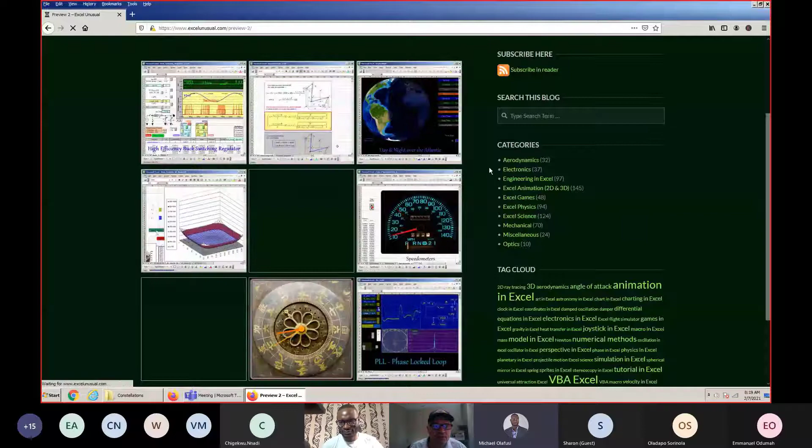Audience, all of what you are seeing here is Excel - all those things you're seeing are Excel. I'm trying to show you this particular model. Okay, here it is, I'm gonna zoom in. This is low resolution, but right here to the right is the model I was telling you about - this is the adaptive filter, adaptive equalizer. It's changing very fast, but essentially this is the schematic, the diagram right here.

Okay, on top with the blue you have the bad signal, and on the bottom with green you have the good signal after the filter.

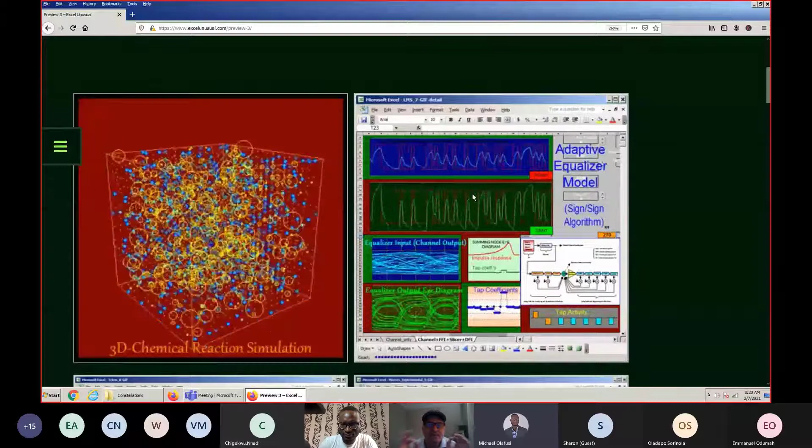Not to tell you more, but when people saw this, after a month I had my Excel sheet managing to adapt or correct this signal. In another month, I had an automatic algorithm that I made just by thinking about the problem and playing with Excel. I don't want to tell you more, but in a month I was out with no job. This triggered envy, because there were people who'd been there over 10, 15 years and didn't understand the filters, because all they did was read the papers rather than trying hands-on to build it like I did in Excel. They were just reading papers and regurgitating formulas, like I was doing for the first few months.

When I started using Excel, every day I got a little bit closer to solving the problem. In a month I had a filter, in two months I had a filter and an algorithm. That convinced me Excel is really gold, because what they were doing for many months, we were meeting at restaurants, at lunch with vendors, trying to buy software to simulate and design these filters. And there's this new guy who doesn't know much, who comes from a different company, and he does this in Excel. This was an eye-opener for me.

After this, I went to work as a consultant, a contractor, for a company called Freescale Semiconductor, which was formerly Motorola. What they were doing there was accelerometers and gyroscopes for automotive use, for cars, deploying airbags or stability control.

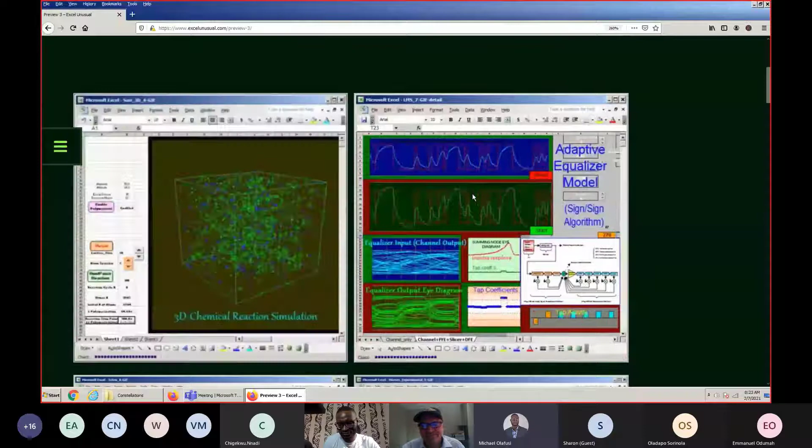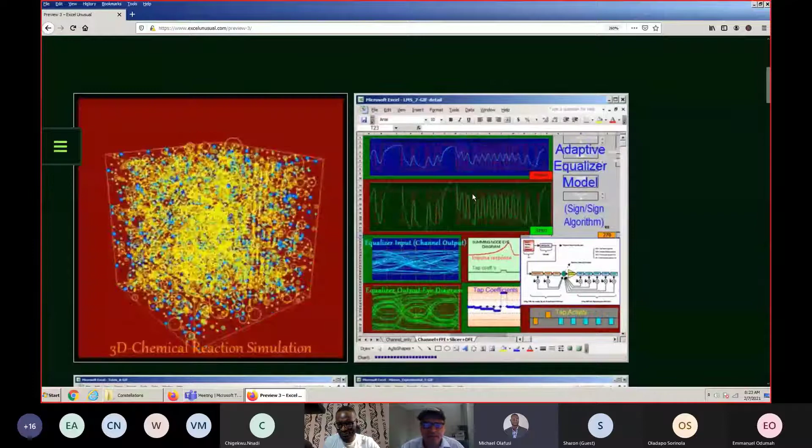When I got there, I don't want to say I lied, but I exaggerated what I knew. They were using MATLAB, so I said I know MATLAB, okay? I didn't really know MATLAB, but going there I saw what they had in MATLAB, and there's always a schematic like what you see right here, these blocks. This was done in MATLAB, and they told me, George, you're going to need, I don't know, four months to begin to understand these things.

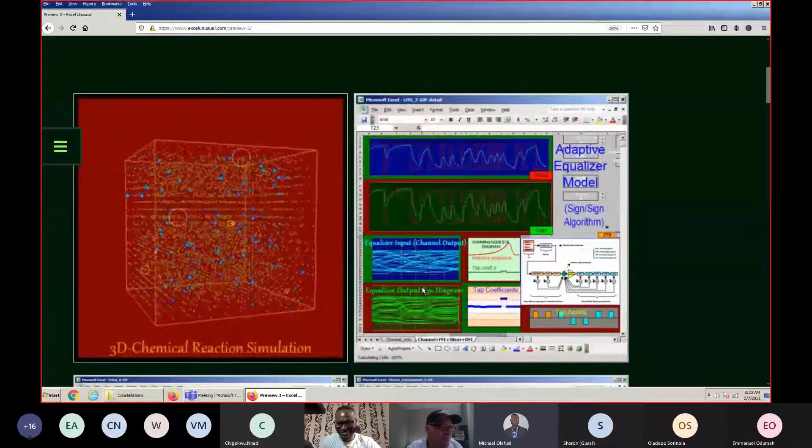I was looking at it, and I didn't say it, but I was thinking, I don't think so. So I went home and spent two weeks, 12 days actually, looking very hard and trying to replicate in Excel what they did in MATLAB, seeing these block diagrams like you have here. In about 12 days, spending probably 4 to 6 hours very late at night, I managed to come up with a model in Excel. This time I knew much more Excel than when I went to Vitesse half a year before.

I made this nice animated model that was solving several problems. These accelerometers and gyroscopes need to be certified, going through a battery of different tests. My model in Excel, the old Excel, was running, I believe, about 22 seconds. In 22 seconds it was doing what they were doing using software and an operator, reloading and redefining tests, going through a battery of tests in maybe 40 minutes. So my thing, because it was all automated in Excel, was running almost 100 times faster, in a program that's free, relatively free.

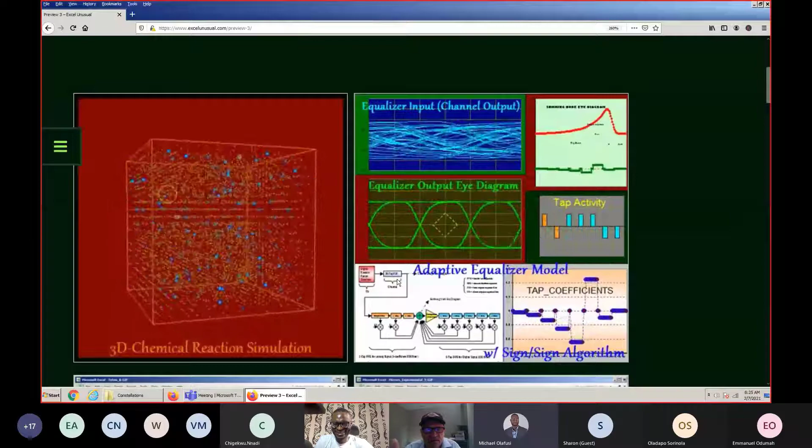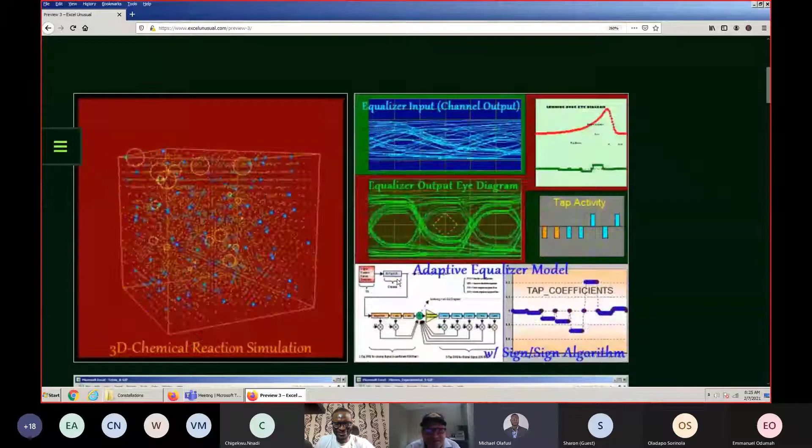I got a lot of pushback, especially the chief engineer got very aggressive. He came to me at lunch and said, I'm going to kill you. I said, why? He said, because you stole my model. I said, no, I didn't steal anything, I just did it in Excel. Needless to say, in about 10 days I was out too.

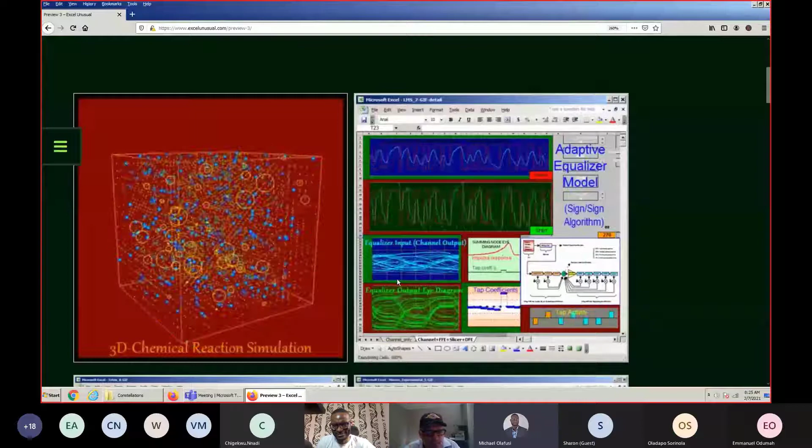So then I said, you know what, don't mix this with work, because you discover stuff. Excel is so powerful in helping you understand problems that oftentimes you have a whole team and they don't make progress, while in Excel it's so easy to really understand the problem step by step, building small slices every day.

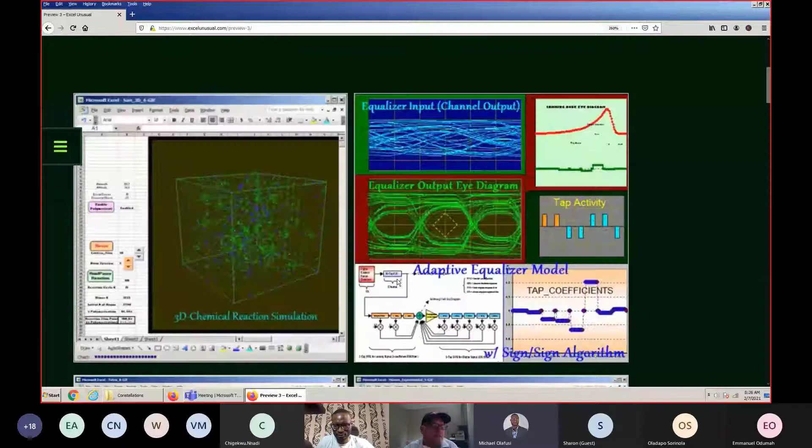Let's do some fun stuff. Then I started doing planetary motion, actually while at Freescale in Arizona. I made this kind of stuff right here, this is a planetary model, yes, these two. Again, my principle in doing this is not to just go to the formula, but to ask how much do I actually know about this.

I know a little bit because in high school, in 9th grade, we were doing mechanics, and I know there was a formula showing that the attraction between two bodies is proportional to the product of their masses, inversely proportional to the square of the distance, with a constant in front. So I knew that.

And also I knew something I deepened working for these guys in Arizona, which means Newton's three fundamental laws. One is action and reaction, another is force equals mass times acceleration, and the first one is: if you don't touch an object, it will continue to move in a straight line with the same speed, or stay on the spot. This is valid in an inertial system of reference.

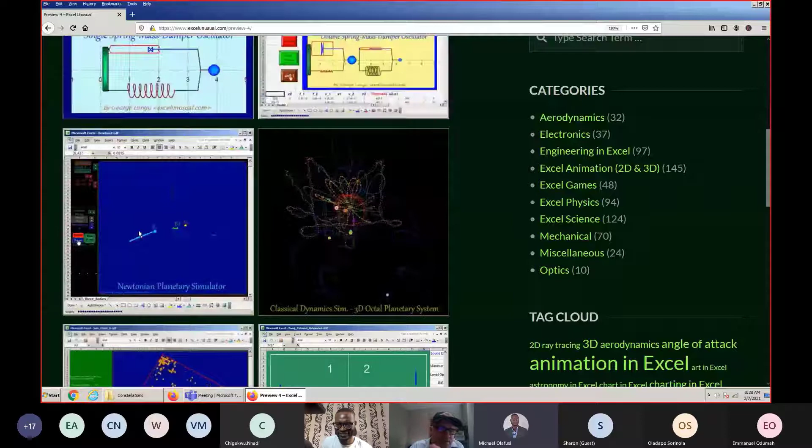So essentially, knowing the force, you can divide by mass to find acceleration. You can integrate to find speed, and integrate again, double integrate, to find coordinates. So here I am, having a few elementary and fundamental concepts from freshman year in high school, being able to model mechanical things I never dreamt of, and doing this in Excel. So I had a lot of fun.

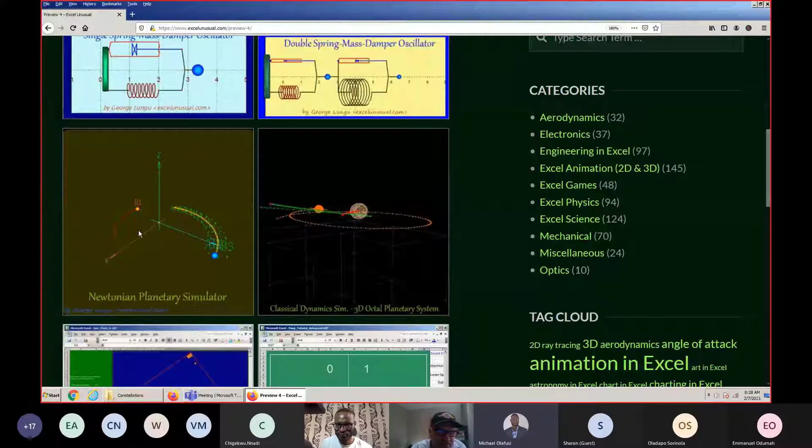After that, I spent quite a few months at home doing just fun work. And this is another one. This is essentially what you see here on top. Let me see, these are accelerometers, both of them.

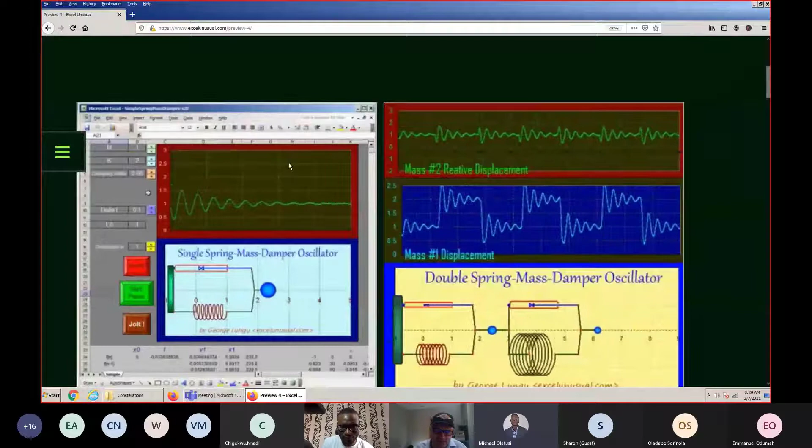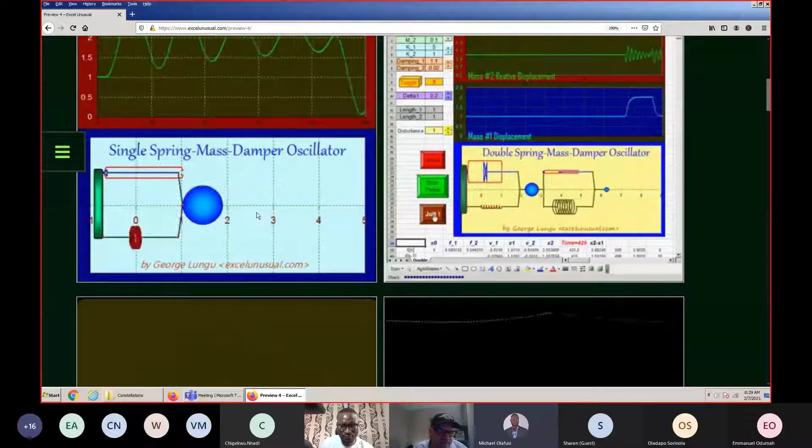So an accelerometer essentially is a mass, a weight tied to a heavy base. In our case, this is a car. So you have a vehicle and a little mass tied with a spring, and this is called a damper. It's essentially a strut, it dampens oscillation. Here are two of them in series, and depending on the deflection or departure of this mass from equilibrium, you can determine the acceleration of the car.

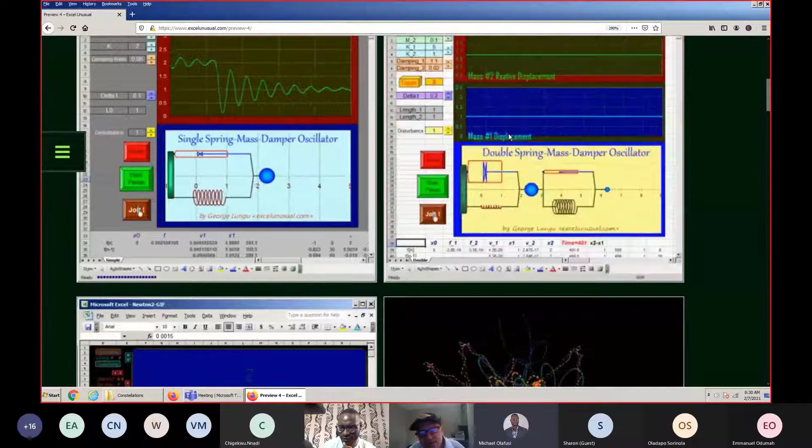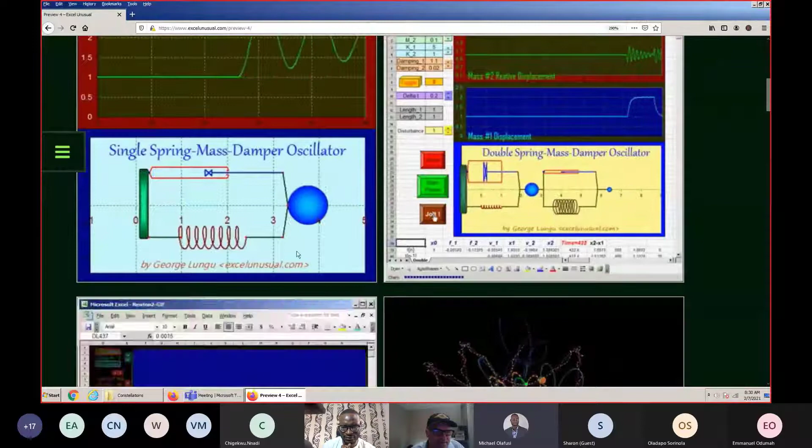You see this green rectangle? This represents the vehicle. Based on this deflection, you can decide to either deploy the airbag, not deploy the airbag, or lower the power, even though the driver maybe pushes the gas. When the deflection of this little mass, which is usually built very small in a chip, exceeds a certain limit, you can decide to cut off the power from the wheel so the car doesn't get into a spin, into a skid.

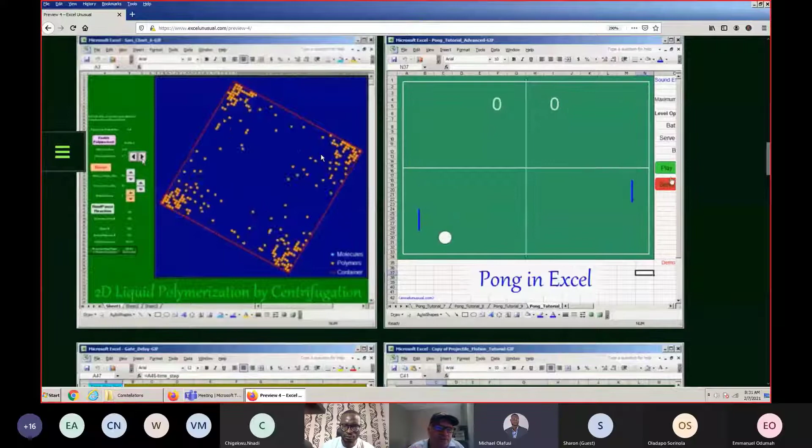Okay, I'm going to show you a few more things. This right here is a polymerization model, and I did this in 2018, and even though by that time I was using VBA very sparingly. Most of my models until 2018 were done in cell formulas, with very little macro, the start-stop macro and the counter macro, the one that counts 1, 2, 3, 4.

So I was writing many different formulas. Actually, let me minimize this and show you a physical file, okay?

I invite you to go to this website, excelunusual.com, and type roller coaster, and download this roller coaster. Click on either one of these two. I typed roller coaster in the search box, I click on one of them, this is a video, but you can click on this Excel download button, and it asks if you want to open it. Yes. If you have the old Excel, it's very fast; the new Excel is slower, but it will still run, though you might have to enable macros.

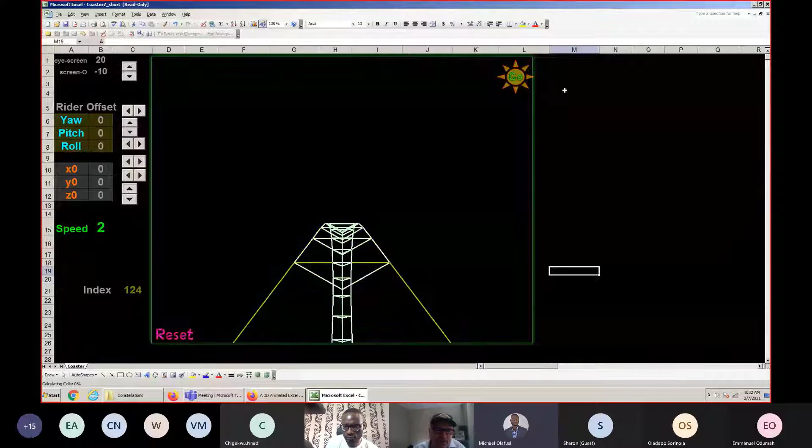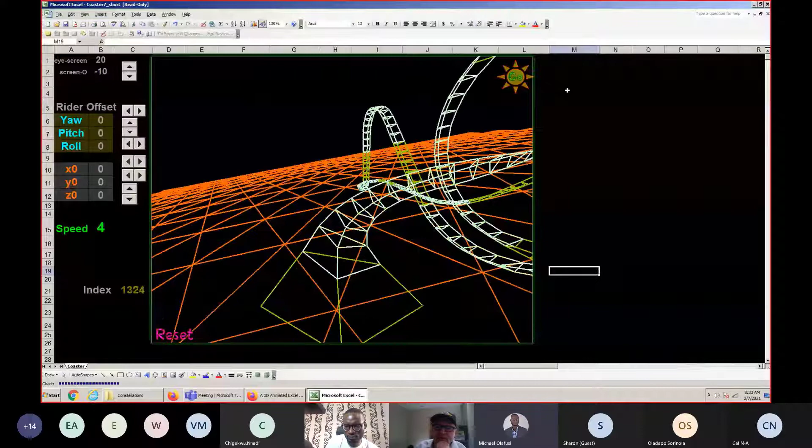So you see this sun here? I click on it and it takes me to a little roller coaster ride, and you can just watch the screen, but you can also download it later or now, whenever you want. It throws you through some curves, through some turns, and then through a loop, through the eye of the loop. You can see here these numbers changing, you have formulas here, this is a formula. So what I was doing, I had a macro.

You see this index, this is the macro I was mentioning at the beginning that counts up. You see it's counting up, 1, 2, 3, 4, up. This little number that grows is included in some formulas, and the formulas will generate this roller coaster.

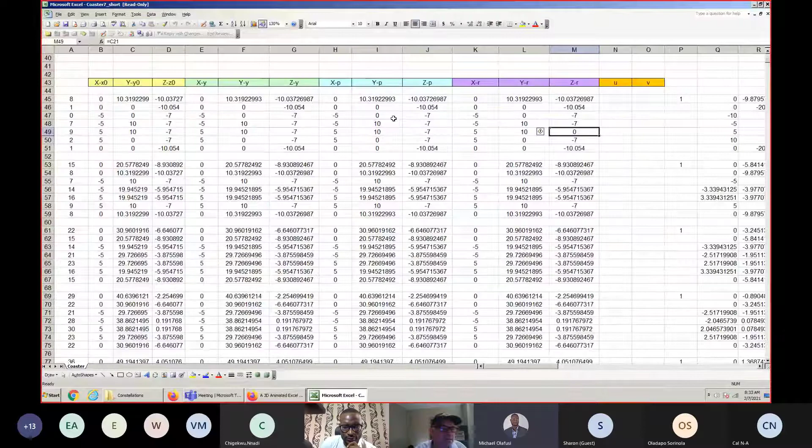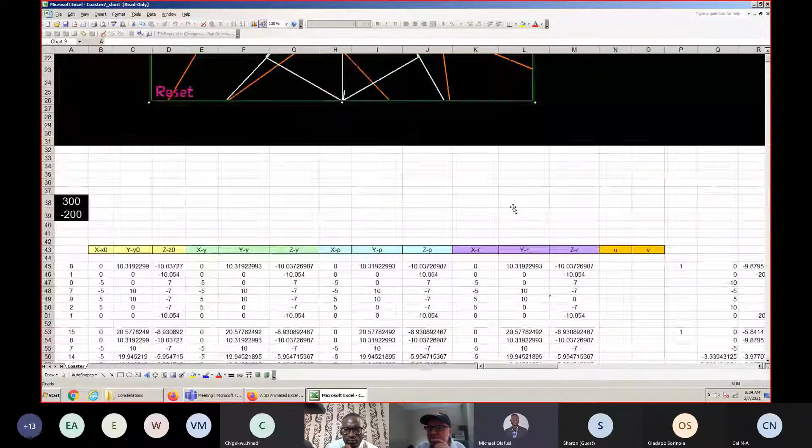So how do you generate this roller coaster? If each of these points... I did something here. I cannot click on it because this is modified, but if I close this and open another sheet...

So let's say 0, 0, okay, and call this column X. I'm going to show you how to build a small, very basic model, X and Y, okay? Click on this, center everything, and let's say 1, 1 here. Take this and say insert chart, and I always like to use this scatter chart with broken lines.

So let's make this format axis from -5 to 5. Michael, do you think I should waste 5-10 minutes to do this, or I should just talk? Yeah. Yes, please do it. We are enjoying it. Well, I'm enjoying it.

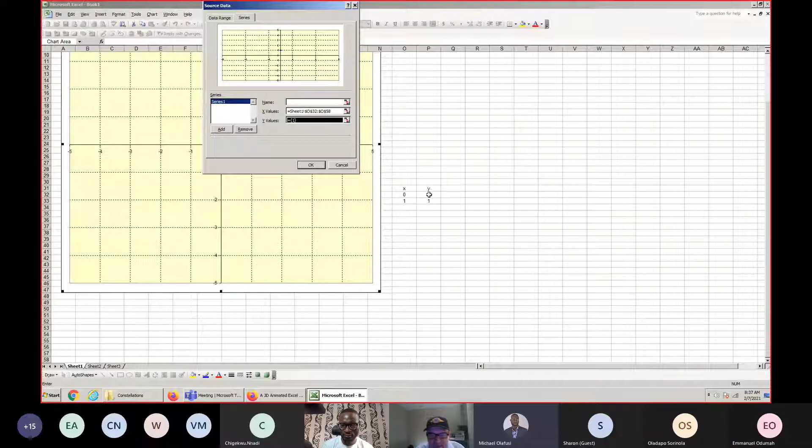This is very basic, but it will give you an idea. X is on this axis, Y is on the vertical axis. 0, 0. How come I don't see it? Let me see, because source data is probably all messed up. I'm gonna delete this, remove, and add a series. For the X values, I'm gonna highlight this all the way down, and for the Y axis, I'm gonna highlight right here, okay.

And I'm gonna make the points much bigger so you can see what I'm doing here, okay? But essentially you have 0, 0, this point, 1, 1. Let's make this, let's bring this to 2, 0, okay? 2, 0.

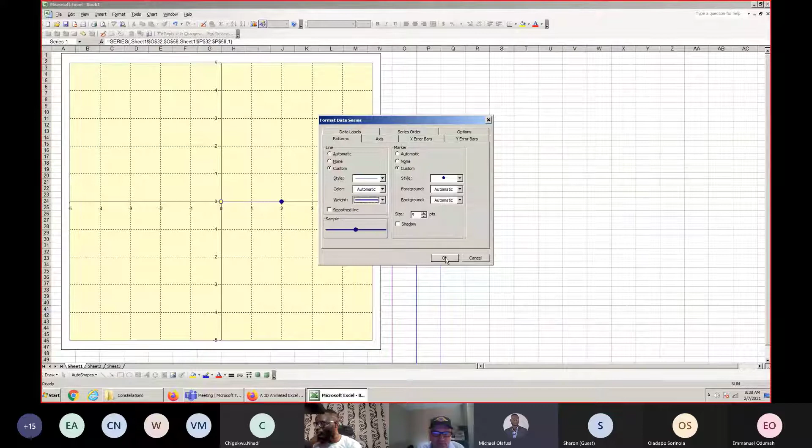So you see what I have here. I'm gonna increase the line thickness, make it really fat, and let's put a point right here, okay? So 2, 2, okay? 2, 2.

And again, if I click on it, you see I selected a lot of points. Let's select a point here, -2, 2. Select another point right here, so -2, -2.

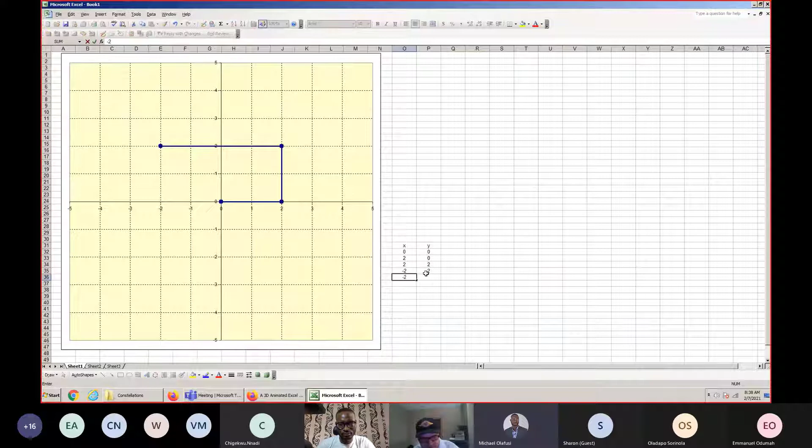Change the first point to 0, -2. See, I'm just looking at the chart and seeing what I have here. Again, -2, and let's bring this point back a little bit where we started, where we ended. So -2, oops. So we got a square, okay.

And I want to also add, this wants to be a house, a very little house, okay? So let's add here a point, let's say right here, okay? So 0, 4, 0, 4. This is very important because I'll show you how to break this line, okay?

I just move this here. So when you leave an empty space in the table, there won't be a line. So let's put this point back here. Instead of 0, 4, let's actually put it right here: -3 plus 2. So -3 plus 2.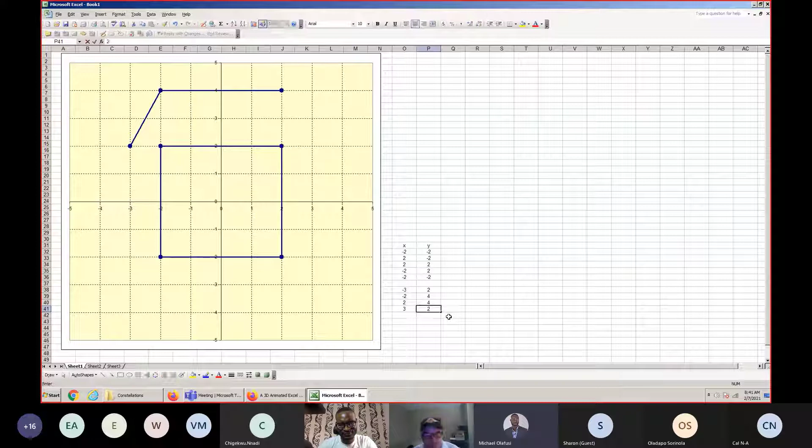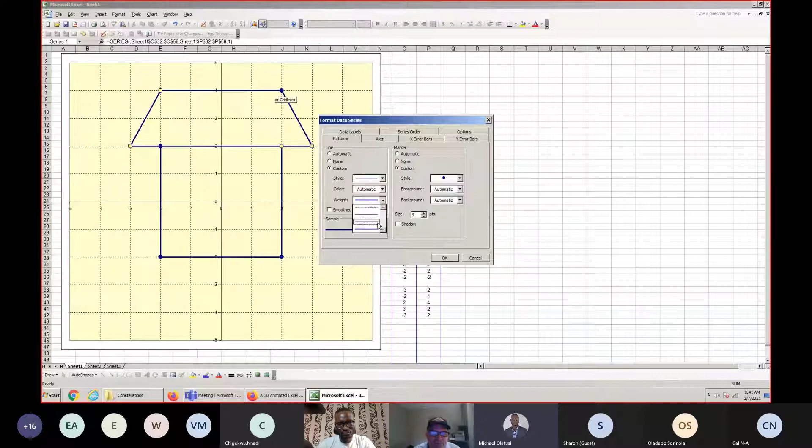I'm gonna go here, 3, 2, and also go back to the first point, so this is equal to this. And again, you can go here and click once. If you click once and then double click, you can change the color. Let's make this red, all the house, or just click once, wait a little bit, click twice, and then you can change the color of just that particular segment, okay?

So you can use this. Another thing you can use: take this, move it here, and have 2 different charts, 2 different series. So for this one, let's say you click and say, let's make it blue.

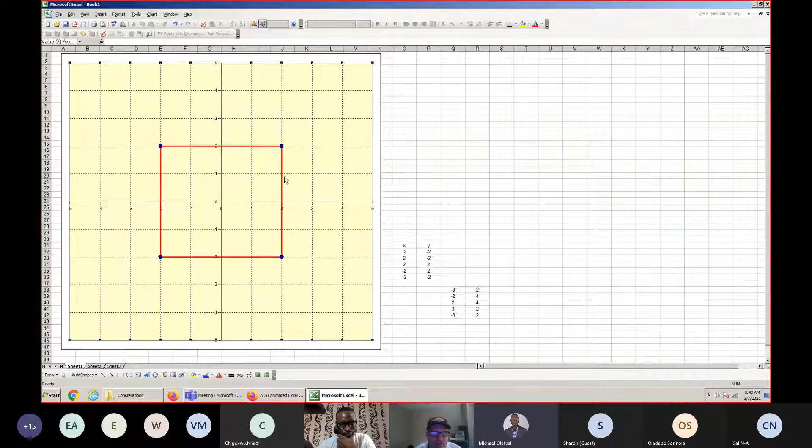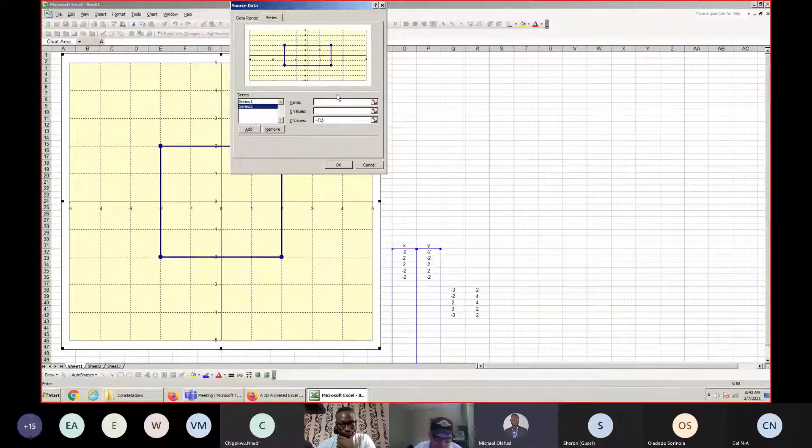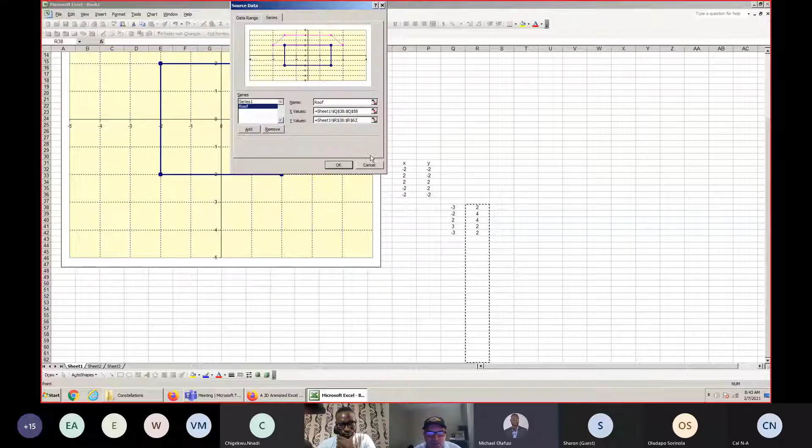Right click, source data, add series. Let's call this roof. Take the X from here and the Y from here, and you have a roof. For this roof, like we did before, we format it. I can also build a door, a window, whatever.

Another thing that preoccupied me from the beginning while I was in Arizona: when I started doing this, how can I do 3-dimensional charting?

There is a post in my blog right here. If you type 3D, meaning 3-dimensional, you can go, and there is right here, I believe. Let me see. I believe this one you can hit continue reading, and it shows you how to do it. Maybe this one, yes.

Essentially, I realized that you don't learn anything for a long time if you just read formulas and try to understand the mathematical derivation. What you need to do, after you learn some principles in school, is go away and start from zero, close the door, don't read, don't watch videos. Try to figure yourself out with a pen and paper, and even better with Excel. Try to figure out how did I do that? Can I remember? Can I rebuild, re-derive this?

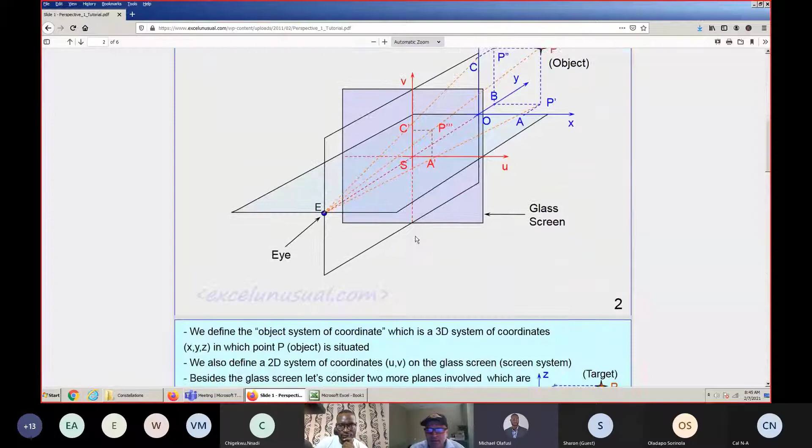So let me just, if you click there. So here, I don't know where, oh here is the little gun. So I have a little gun, I have the 3-dimensional object, and I shoot to the point that I'm trying to represent with the gun, and the bullet creates a little hole.

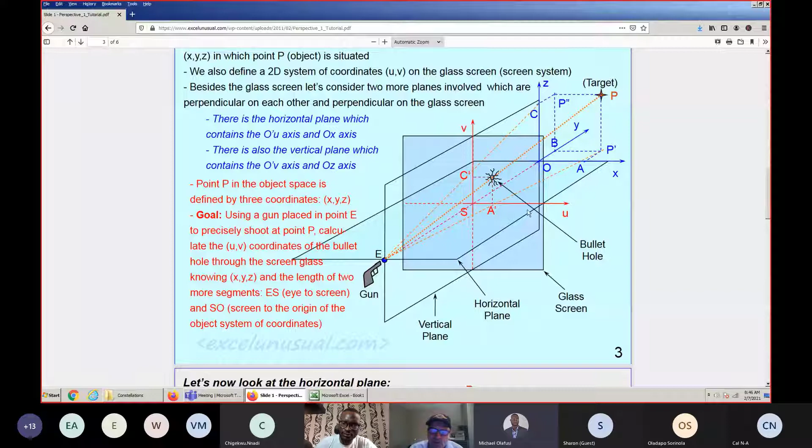How would I describe the X, Y coordinates on the screen, which I think they use the letters U V instead of X Y? So in 3-dimensional you have X, Y, Z. In 2-dimensional you have U and V. And I came up with very basic formulas. Essentially, knowing X, Y, Z, how do you come up with this U V using very simple geometry?

Again, most of the stuff you do in school, in high school, even in college, I wouldn't say is useless, because it teaches you how to think. It exercises your mind, but you will never need it in practice. But there's one thing you always need: geometry, basic geometry, not the level they try to teach you in high school, but things like similar triangles or basic trigonometric formulas.

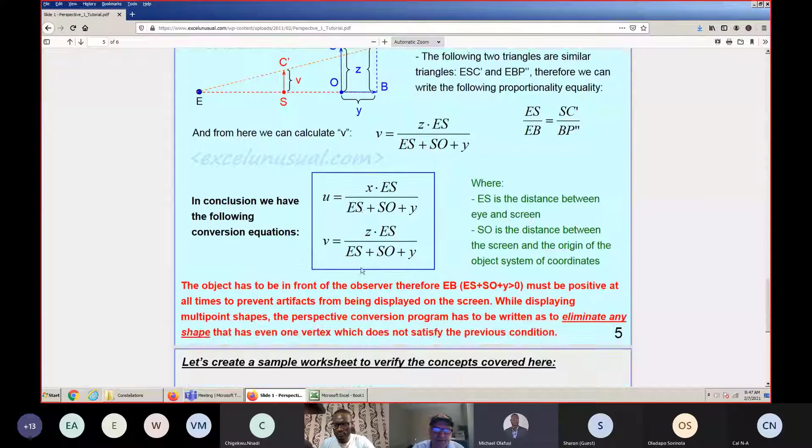So essentially, knowing X, Y, Z of the object, I can find U, V, the 2-dimensional coordinates, knowing the 3-dimensional coordinate, and knowing also how far the object is from the screen, S-O, screen to object, and also how far my eye is from the screen, E to S. Using this, essentially you can take a lot of 3-dimensional stuff and turn it into a 2-dimensional image.

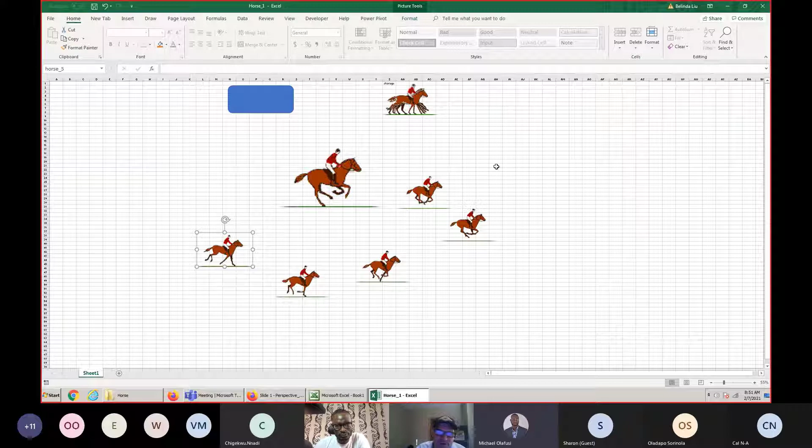Let's say you see the horse in different positions. What you do is take one picture at a time and display it in a certain area of the screen where you can see it, and keep the rest of the images hidden somewhere far away. In this case, they're not hidden because I want people to see what I'm doing. So you not only bring them on the screen, but also move the image.

So I'm going to stop this and go to Macro, Developer, Visual Basic, and... well, maybe I shouldn't get into details, because anything I do, even though I know it very well when I do it, there's something I do, and I advise you to do the same.

Unless you use something very often—like let's say you're an accountant and you use pivot tables or VLOOKUP, which I never use, but let's say you need to know stuff you use every day, especially if you have a boss and need to work very fast.

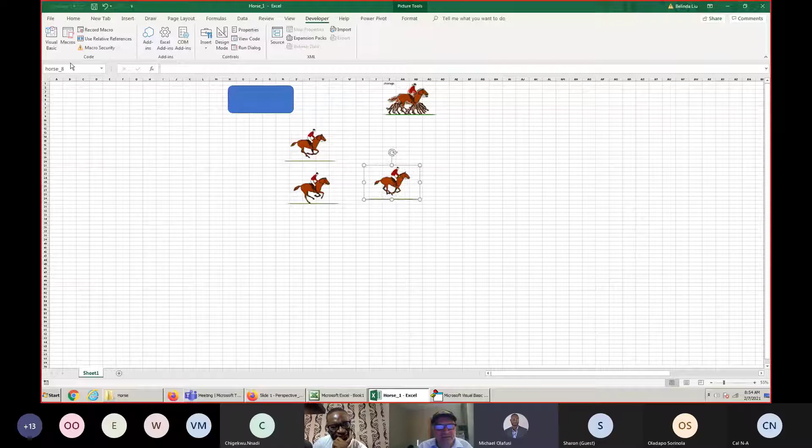This do loop displays a certain horse image at any time, only one image at a time, a different image, because I name these images—like you see, this one is called horse 10, this is horse 9, this is horse 8. So I have from 0 to 10, 11 horses, all different. This loop counts up from 0 to...

Let me see—I think this is the animation loop. This loop changes the horses. And this loop, I think, moves the horses from left to right. But if you see here, this construct, I think, is called concatenation.

Essentially, I act on an image called horse and then use this concatenation symbol. You can type concatenation to find out how to use it—most people probably know already. But you can have this index, this mathematical index, change from 0 to 10, and it changes the horse and puts it right here at the coordinate called left.

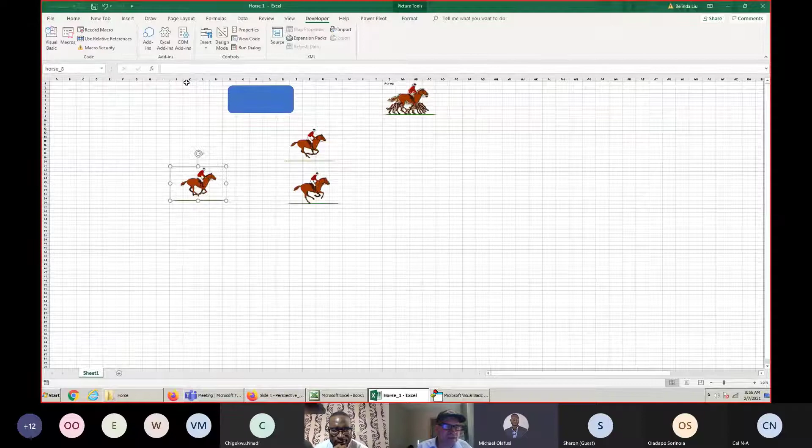And again, probably most people know, if you have an object—let's say horse 10 or horse 8—the distance between this edge and the left side of the screen is called X, the horizontal coordinate, measured from left to right. And the distance between the top edge of the screen and this corner, this top border, is Y.

So in this case, the horses are moved one at a time, brought into view and moved from left to right using this macro right here, this while loop.

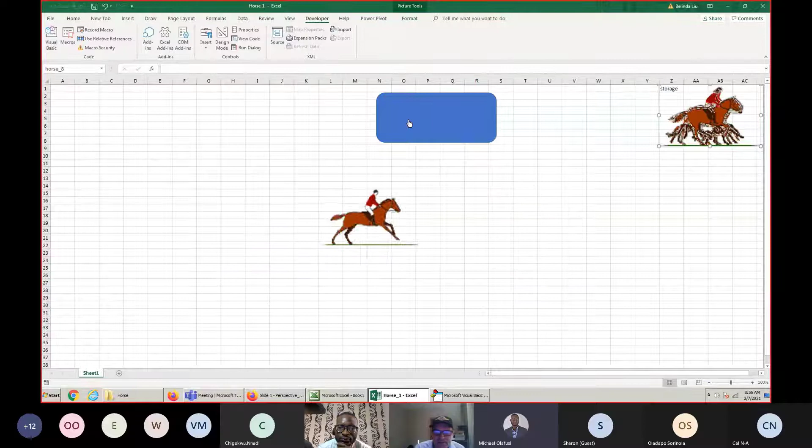And the button itself will start this loop, and when I click it again, I use a certain variable called status—it changes the status. I don't want to go into more details, but I like to have the same button starting and stopping the macro. I call this a start-stop macro.

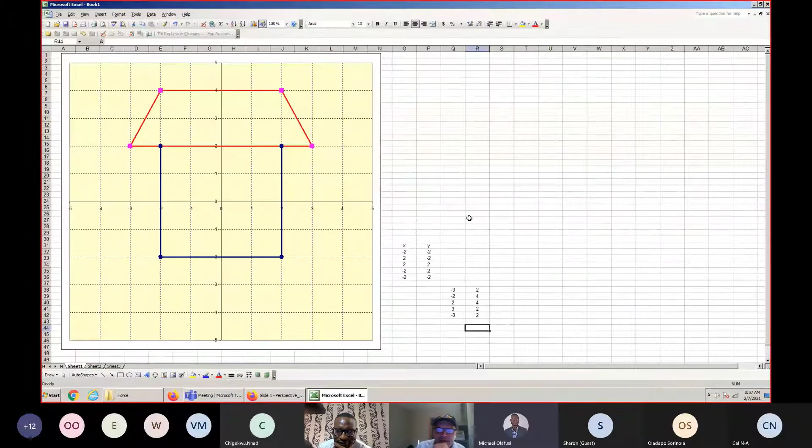So let me go over a few things. I think Mike shared the screen—the files with you. Yes, I have. Thank you.

I'm gonna start the Christmas tree. You can go right here and start the Christmas tree model.

Since you guys have the new Excel, I'm going to open that instead of the old one, even though the old Excel runs very fast. So I'll open the new Excel first, since that's what you have, and open the model.

This Christmas tree final model is made in the old Excel, and the new Excel has a compatibility mode feature that lets you open it. What's nice about these final models, like the Christmas tree, is you can use both old Excel and new Excel. Okay, I'm going to start this, it's a little bit slower.

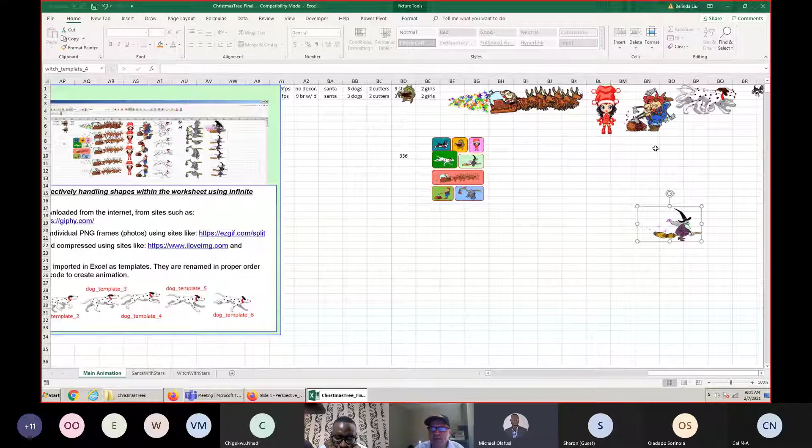Every time I start a macro, it takes the templates, puts them in a designated storage area - for the girls it's here, for Santa it's here - and copies a certain sprite, let's say witch template 4, into witch 4, positions it with a certain orientation and rotation. Then for the next frame, using this loop, it deletes all existing sprites on screen and selects a different sprite for each object I need and places it in the right position. So it's very safe.

This little box here has icons for each object, and each has a certain macro. So if I go here on group, let's say this one, assign macro - you see what it says, dogs presence. So there's a little macro inside the big VBA developer, which I bet there's one called dogs presence. So I use macros and sub-macros.

This bigger macro is a little more complicated - I have no idea how it works right now, but it's enough for me to spend maybe an hour, even less, to figure everything out. My advice for you: do not memorize syntax unless you use it every day. Don't worry if you forgot, don't feel stupid because you're not. People who are stupid are the ones who know a few tricks, memorize them, and keep their mind occupied with this kind of little syntax.

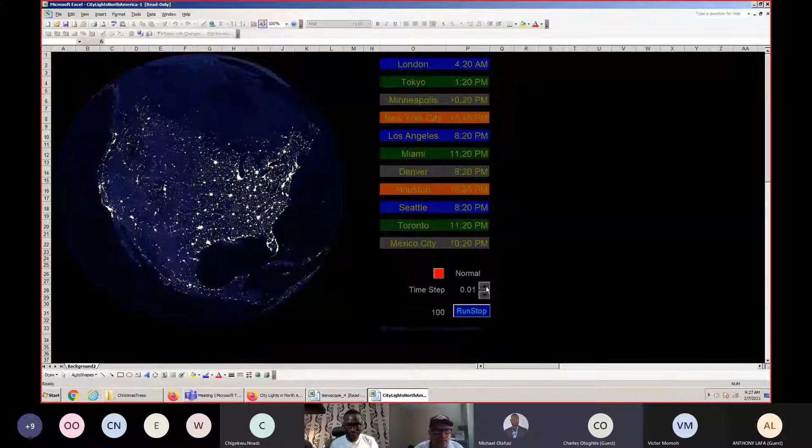So what I do is I went online and typed satellite images of the Earth, and I found there's a fellow, he may be a physicist or something, he posts images from a certain satellite. If you read the comments, just go on the site and find these posts, type Day, Night, or America, or Atlantic, whatever. You see these are the posts. One is called City Lights in North America video, and the other is City... let's say that day, the other is called Day and Night over the Atlantic, okay?

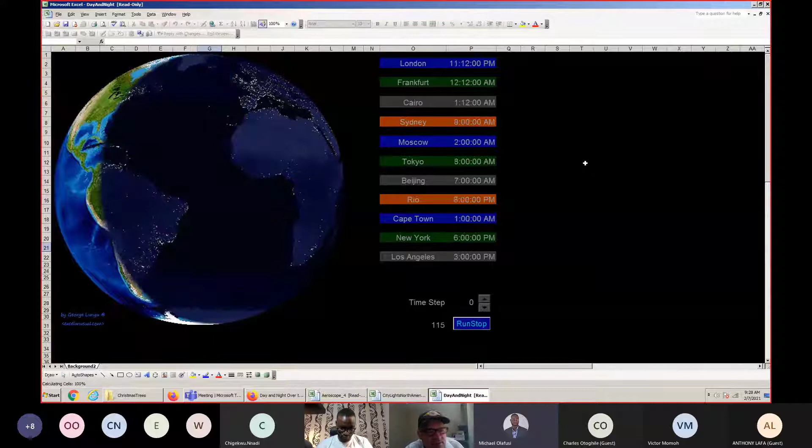So this is better because, let me see... yeah, so it shows the time. So I take these images, let's say spaced, I forgot, maybe 10 minutes apart, and I put them on a chart, making sure they're all the same size.

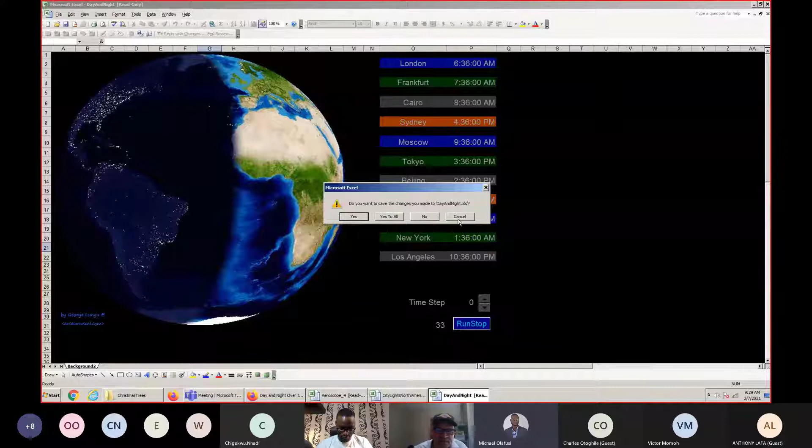But the really cool stuff that you can really develop and learn much more, this is just basic, pretty dumb animation, is planetary motion. The planetary motion I use is based on dynamic principles. What dynamic does mean, in my case, is like static and then no. There's two parts of mechanics, of mechanical physics. One is kinematics, which refers only to speeds, coordinates, and acceleration. It doesn't refer to causes of motion, like forces.

So if you watch, say, a boxing game, between Mike Tyson and Joshua, you can watch on TV and not worry about forces. You just see the speed of the fist, the angle, the acceleration - that's called kinematics. Then there's dynamics, where you worry about forces. You know that Joshua can push 100 kilograms with a fist, whereas Mike Tyson maybe 120. You know Joshua can move his body faster, but Mike Tyson can move it slower but maybe stronger. So you worry about forces, using the second law, which is force equals mass times acceleration.

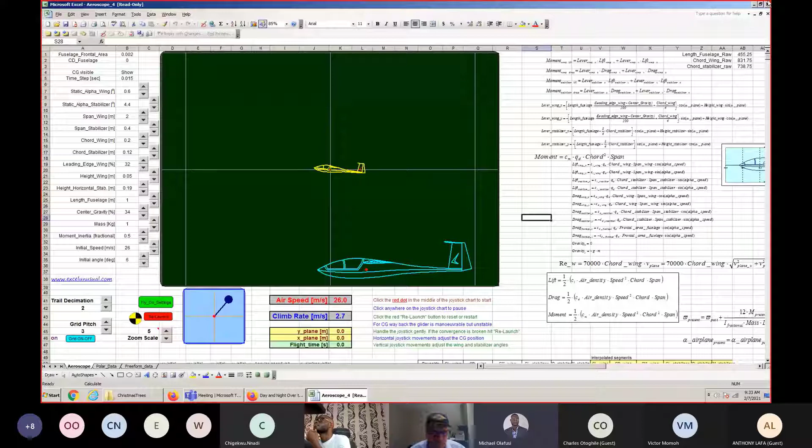Hello? Okay, I was. Yeah. Go ahead. Okay, let me... It's like you're sharing something on the screen. So let me quickly bring your screen back up. Yes.

Awesome. Okay. Whoa. Wow. This is something else. Wow. This is a model. Let me make a little parenthesis here. This is a model I made in 2010 and 2011. Wow. It's all based on dynamics and real physics.

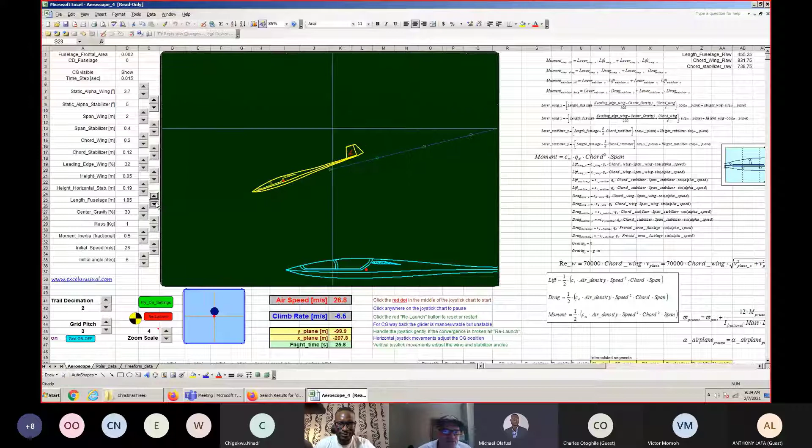Okay, so you can have this plane running, and, wow, you can change - relative to engineering - various parameters as the plane flies, such as the length of the fuselage, okay, and see the effect. This is good for engineering, this kind of approach. If you make the fuselage very long or short, the length of the body, oops, what happened here is...

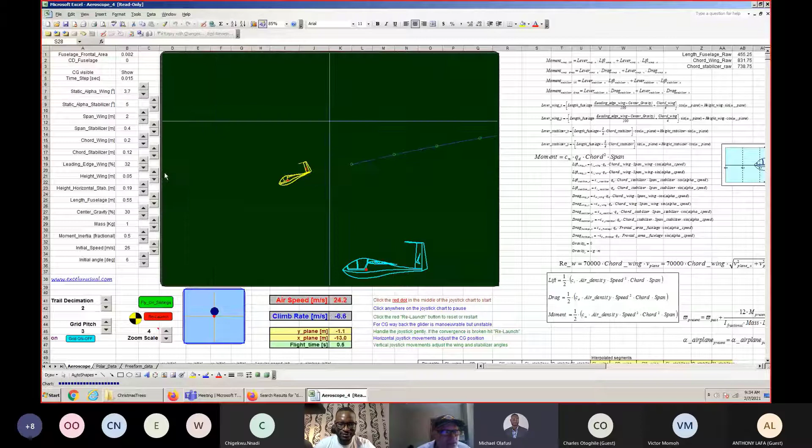It's called loss of convergence. When you fly commercially... where is the length of the fuselage? Okay, here.

They always, if the plane is not full - if the plane is, say, only a quarter of the passengers are in - the stewardess, the flight attendant, comes and says, can you guys come in the front? Why? Because...

I explained this in my blog. This is a little bit more evolved, but if the center of gravity in a plane is too much in the back, the plane becomes unstable. So if, let's say, there is a plane hijacking and the terrorists put the people in the back, so nobody's in the front, the plane will crash - the pilot would not be able to keep the plane stable. So if you use this model, you can prove that, and I talk about this in my blog.

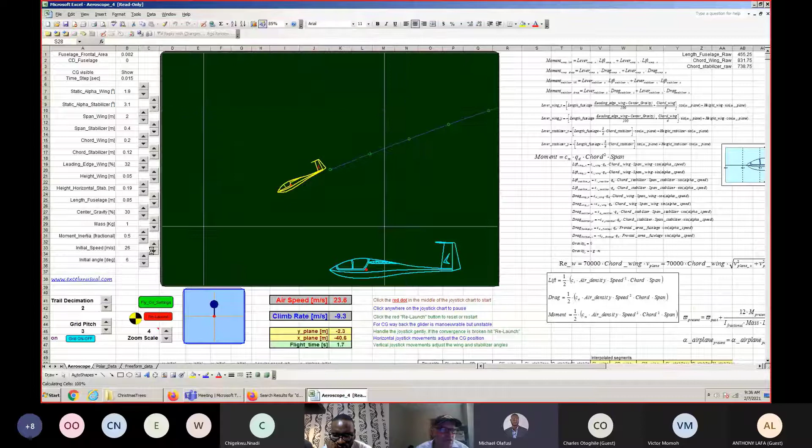But I'm saying you can run this model, and as you run it, you can change various parameters, such as the height of the wing. You see... but again, I'm in an unstable situation.

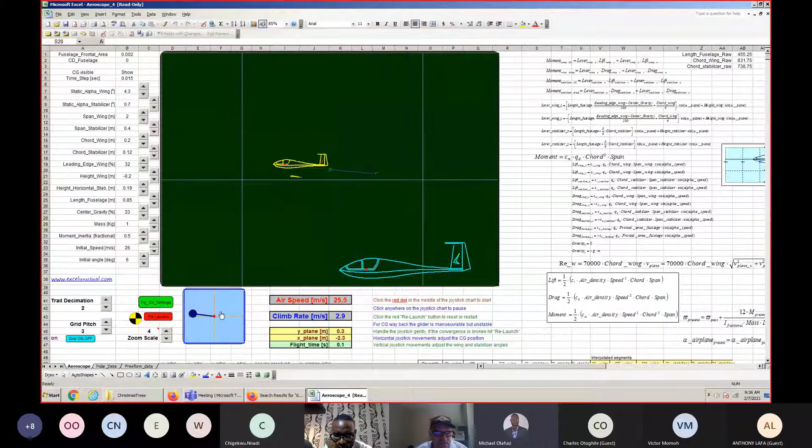Or you can use this - you see, this is a virtual joystick. Okay. If I push it forward, you see the angles change, and you can do various things. Wow. If you go back and forth, you see the red dot - that's the center of gravity. Okay.

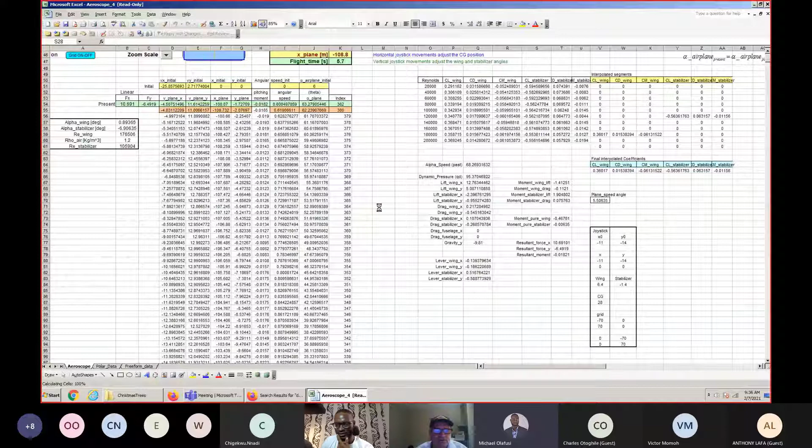This is done long ago when I was using very little VBA. All the formulas are here again. Oh. So what I have here is I took a little program called...

XFLR5. It's essentially a French repackaging of a program built by an MIT professor, where you can put a wing profile - these wing profiles are usually designed by aerodynamics engineers - and based on the various speeds, you can find out the forces and the momenta that act on this wing. And I took this data, I simulated by hand several situations for various angles, for various speeds, and I put them in Excel as many tables.

Look, I'm going to zoom out. So there's, I don't know, 5 to 10 tables here.

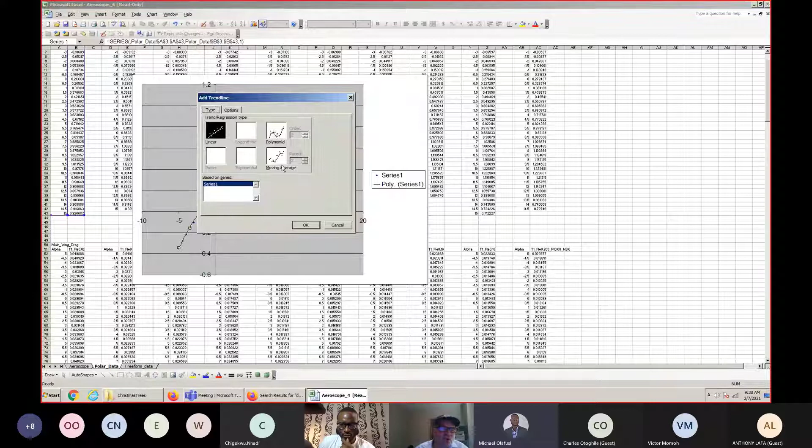And I use something called interpolation. So if you plot anything in Excel, you can add a trend line, and when you choose a certain order, a polynomial—I think I use order 4—it created simple formulas for each of these tables.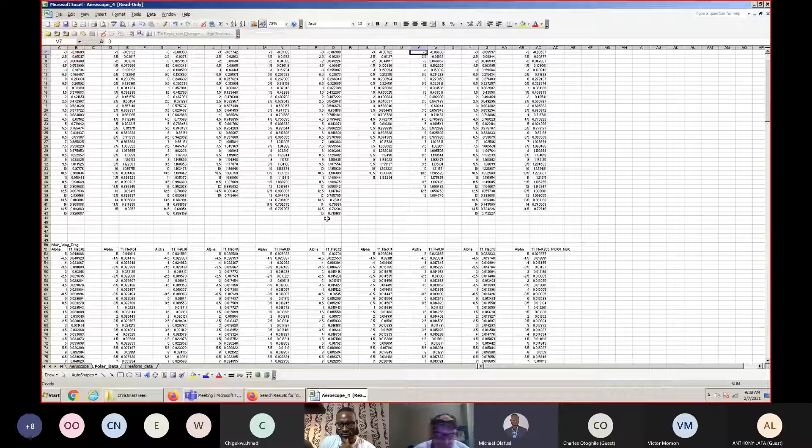So rather than have many points, I have formulas. And another thing is between points—let's say I measured certain parameters for angle 1 and angle 5 degrees. Between them, these formulas can fill out, interpolate the data. And then using the Newton equations, 3 equations, I was able to model this airplane. Okay, I'm done, please come with the next question.